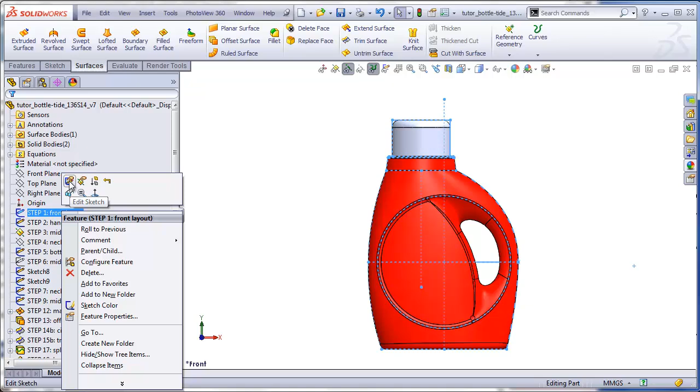First thing you want to do is always make sure that as much as possible your sketches are fully defined. So here is, for example, my layout sketch on the front plane, and we see that all my lines are black. I found it convenient to have the base of the bottle be centered right on the origin. And this vertical center line is the main center line for the bottle, which the circular label area is centered on. So this has a midpoint relation here for the base to my origin.

I also dimensioned this side of the bottle to my center line, and this side of the bottle to the center line also, but independently, so there is no midpoint relation here, which allows me to move this point left and right independently of this point. That way, if I'm having trouble getting the shape of the bottle to be just right in this area, I can tweak this point a little bit without messing up what's going on over here.

I have a secondary axis here, and that's what the cap and neck ring are centered on. You'll notice I'm hiding some of the dimensions off the screen here because, as I've mentioned before, my students have been asked to measure their own bottle and determine what the appropriate sizes are. It's not absolutely necessary that the bottle actually be centered right on the origin, but I find that the least confusing way to do it.

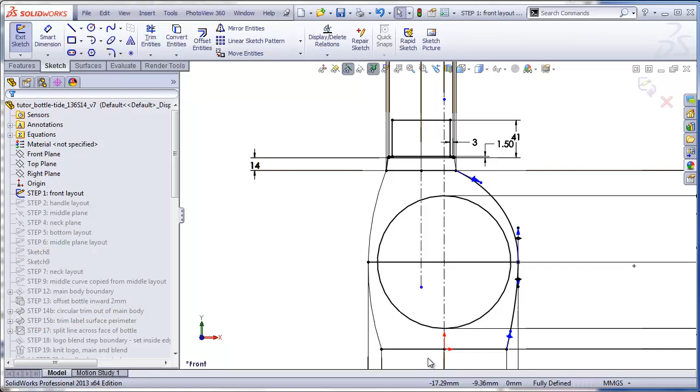Another sketch you should be careful about when you're drawing is your handle layout sketch. And again, you want to try to make all these dimensions fully defined if you can. Most importantly, all the pieces that represent this inner handle contour have to be tangent to each other and possibly, ideally, have equal curvature to each other.

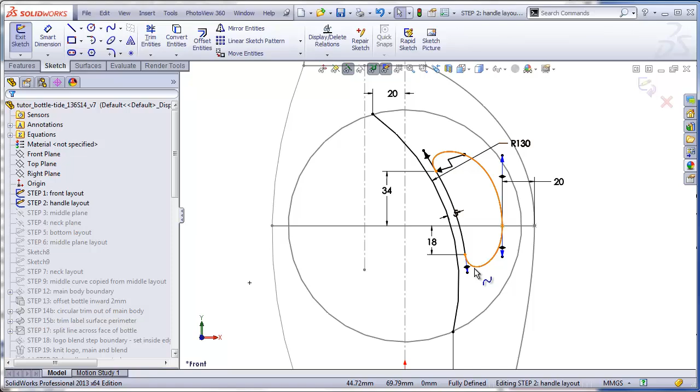I've seen some cases where some people have drawn these pieces and not have them perfectly tangent to each other where they met, and that caused great difficulty when they try to form the fill surface here and the fill surface here. It would actually fail. If Solidworks is refusing to make these fill surfaces, go back to this layout sketch and make sure that all these edges are tangent to each other.

The most difficult thing you will face, however, is drawing this layout on the middle plane. So let's edit that sketch.

And the thing that makes this hard is that we're trying to piece together 4 different splines, and we're controlling where the endpoints of some of those splines are with some construction lines that have coincident or pierce relations to the front layout.

Looking at this from the top view, it seemed to me that the easiest way to control such a complicated shape was to try to piece this all together and then have tangent or equal curvature relations between the joining pieces. But as you might have found out, that sometimes, especially if you have equal curvature between the pieces, these splines can start to freak out on you.

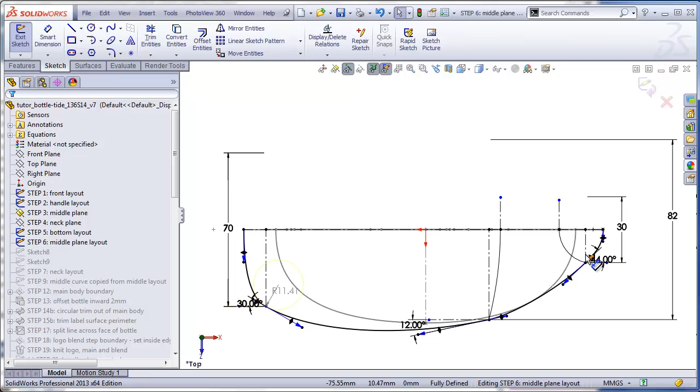So here's a few things that might help. First of all, our most important curve is going to be here and here, because a lot of this area and here are going to be cut out. So let me delete these right now.

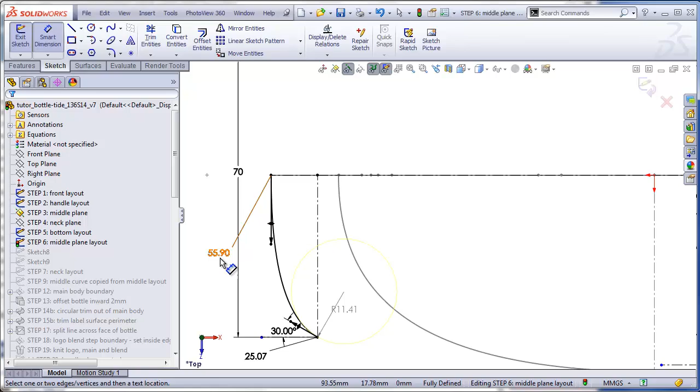And I think what you want to do is draw this first and draw this second, and ideally fully define these. I haven't done that, but what I'm going to do is add some dimensions to my handles. Nice thing about adding dimensions to your handles is that you can tweak things very easily by changing numbers by very small amounts. Sometimes that's hard to do when you're just pulling things by hand.

Now you see these are fully defined. The good thing about that is if I add any new splines and make equal curvature or tangent relations to them, it will force the new splines to adjust to these splines and not mess these splines up.

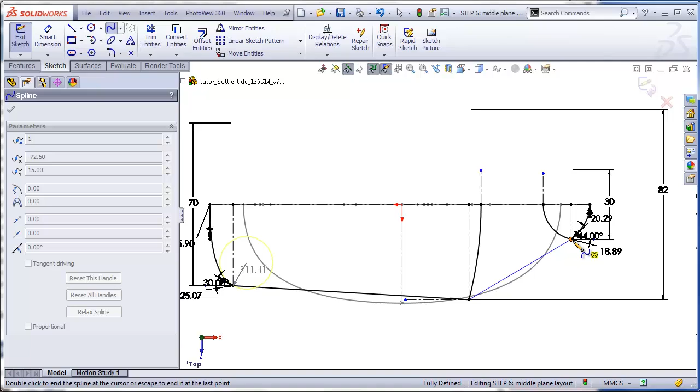So now I'll draw a new spline going from this point to this point, and one going from this point to this point. Here's a case where you might experiment with making this a single 3-point spline that goes from here to here to here, which might actually be easier than splitting this up into 2 separate splines.

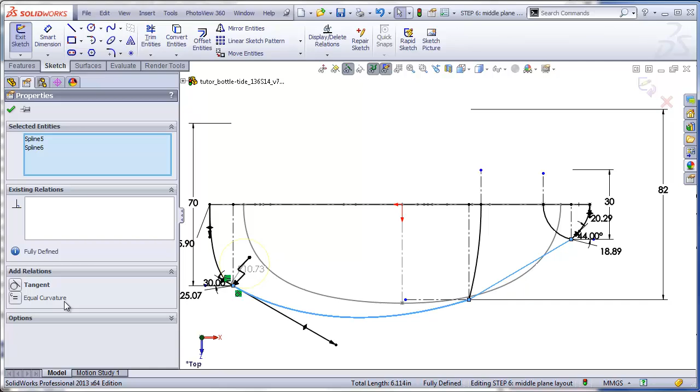Now I can make an equal curvature from here to here, from here to here, and finally from here to here. The good thing is, because I fully defined the 2 end splines, they aren't getting messed up by this equal curvature relation. Now I can start tweaking these handles.

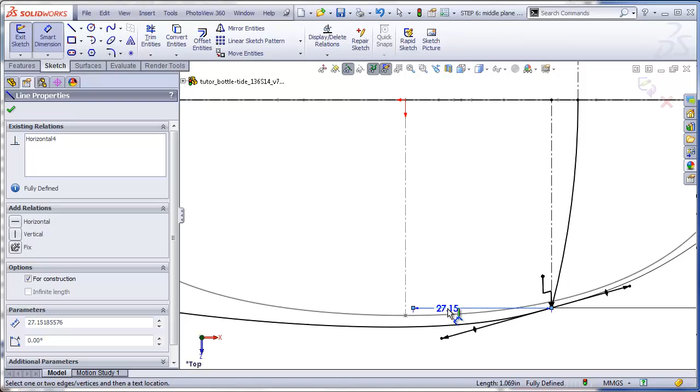Well, that caused a little error there, so I'll Control Z to undo that. If I want, I can also add an angle dimension between this line and my arrow here so that I can tweak this using dimensions rather than trying to do it manually by dragging the arrows. So I'll make that about 15 and hope that doesn't fail.

So you might find it easier using these as anchors and then making these splines conform. The important thing is to try to get as smooth a contour going through here as you possibly can.

Another thing that would be ideal is you want this contour to be completely outside of the contour of the base layout, which you see here in gray. It's okay if this area here goes slightly inside the base layout line, because this part's going to be cut out anyway for the handle. But if this goes too far in, you're going to have a bottle that sort of sucks in when it goes from the base up into the label area.

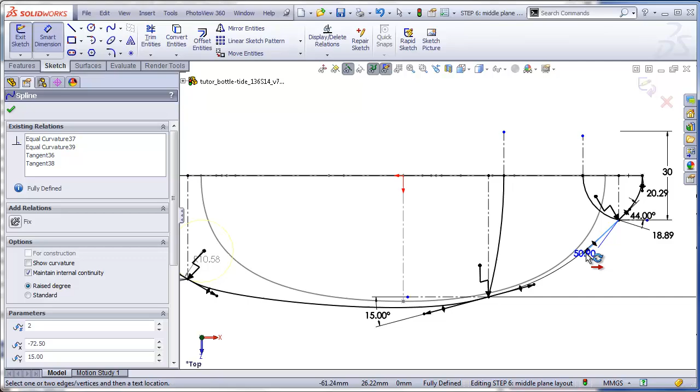Let's see if I can tweak this a little bit more. Well, I get an error there, but you get the idea.

Now, the other thing you can do is, if you cannot get equal curvature relations added without messing everything up, you can always just go with tangent relations instead.

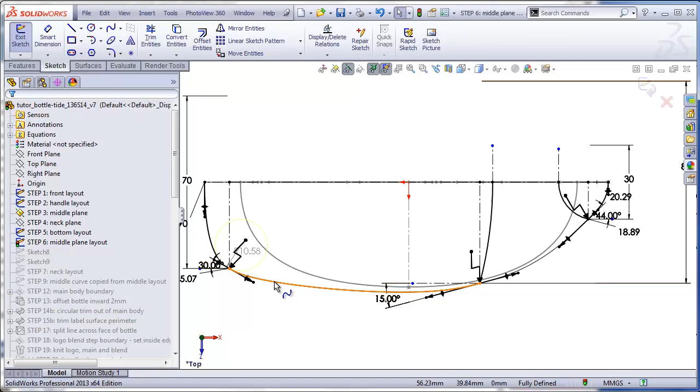Then when you're copying the appropriate elements for the actual boundary, use the fit spline to piece these all together into a single spline, and that will automatically give you equal curvature where these join together.

So let me finish this sketch, and what I'm going to do now is make the sketch that will actually be used within the boundary itself. I'll make a new sketch on my middle plane. What I want to do is copy all these pieces from my layout sketch using convert entities.

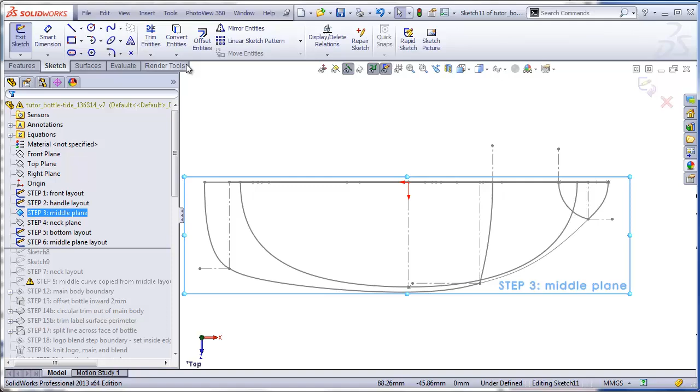And then what I want to do is grab all of these and go up to fit spline. I'm going to zoom in here and take a look at how well the fit spline is matching up with the original contours.

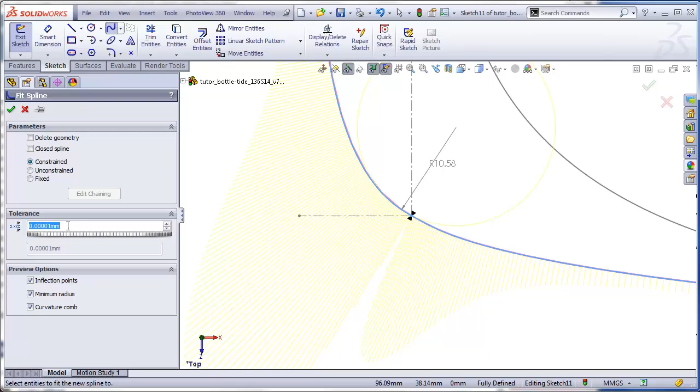And we can set this tolerance here. The tighter the tolerance, the better it matches the original contours. We don't have to go down to such a small tolerance, but we can probably go to about 0.1 millimeters, and that will give us a single spline created from the 4 original splines.

The nice thing about doing it this way is that the original sketch is still preserved in the layout, and then when we copy this into this sketch here and turn it into a fit spline, we still have the opportunity to go back to the layout sketch, make changes there, and this fit spline will be automatically updated.

Another nice thing about not using your original layout sketches for your boundary is that if you decide to make a radical change to your layout sketch, you can automatically update the boundary by just recopying the elements into the sketch that's actually used in the boundary, and usually the boundary will rebuild without any problems.

So if you've already made the boundary and maybe you weren't quite happy with the way it looked because this layout didn't come out quite right, don't feel like you have to delete the boundary and make it all over again.

Instead, modify your middle layout sketch, and then in the sketch that was actually used in the boundary, you can delete all the elements that were in it and recopy the elements from the layout sketch into it. You should get a seamless transfer of elements and have the boundary rebuilt.

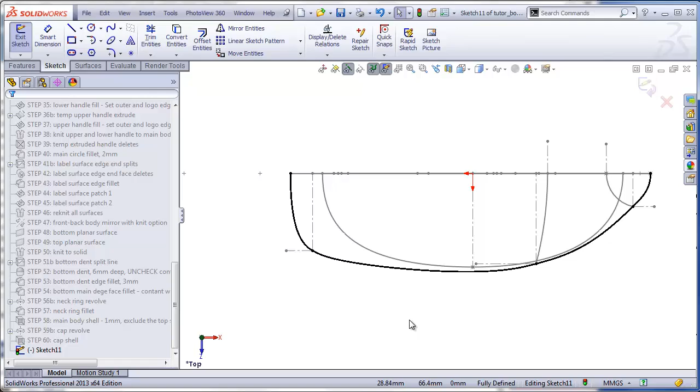Now, going back to the actual layout sketch one more time, there's one other thing you can do if you're just not happy with the shape of this layout. I've been shying away from this, but you've probably been wondering why we can't just make this a single 5-point spline. I'm deleting all the original spline elements, and I'm going to try to make a single spline that goes through all 5 of these points.

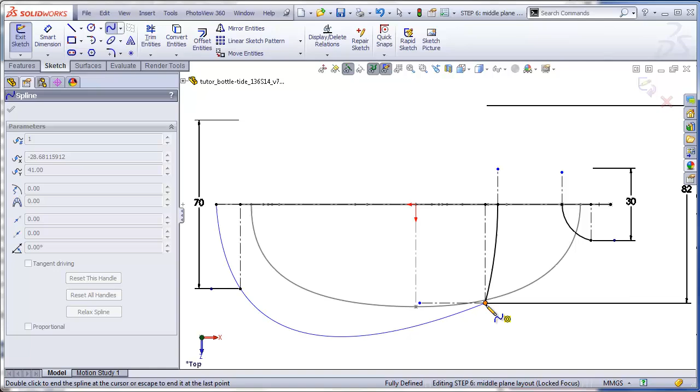It's a little scary because when you get that many points in a spline, you start tweaking on them. You've probably found on your own that the spline can freak out pretty rapidly. So I'm going to just try this: 1, 2, 3, 4, 5.

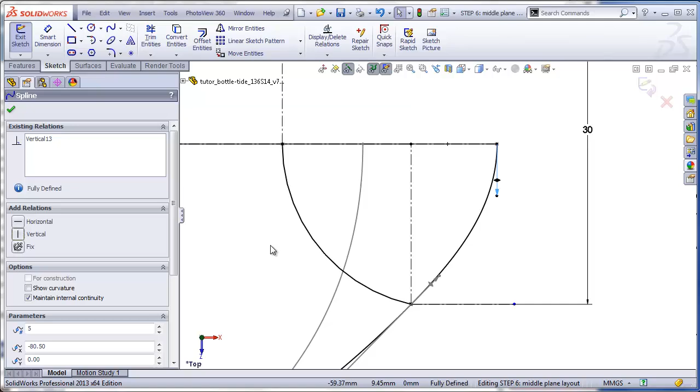Of course, there's no problem there if you're not going to mess with the handles, but we do need to mess around with the handles here. So I'll click on this here. I need to make this handle vertical, and I need to do the same with this one here. Now this is bulging out way too much, and this is too steep in this area.

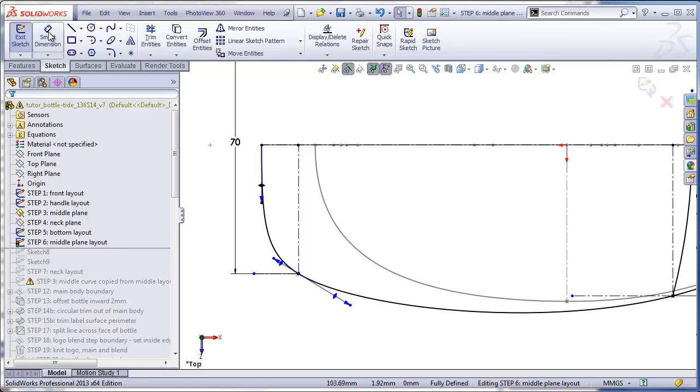So again, I'm going to very slowly tweak these handles, and this is the key here. You don't want to make any radical moves, or the spline might freak out or turn yellow or red. Probably the best thing to do is try to add a dimension to the angle of the control handle here. We'll make that about 60 to help stabilize this area a little bit.

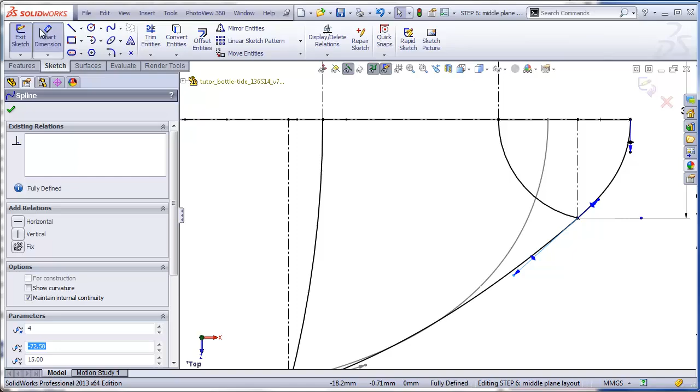And we'll come over here, and again play with the handles just a little bit. Drag this one down just a tiny bit. You see, very slow motions. And again, let's try adding a dimension here, and then go back again.

This is actually looking pretty good. We'll just try to tweak this handle here.

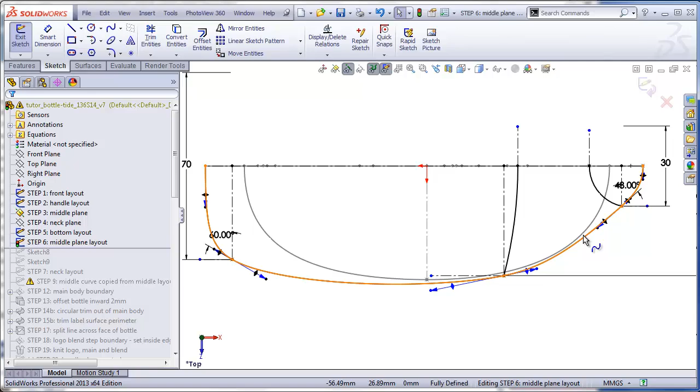And if you can manage to make this work, you'll get the smoothest result by making this a single spline. But I know it can be very frustrating.

One thing that can help is turning on your curvature combs. Right-click on the spline and go to Show Curvature Combs, which is just here at the bottom of the screen, and you might not be able to see it. Here we see the curvature where the spikes are the longest on the comb - that's the tightest radius. Where it's the shortest, that's the flattest radius. So here it's very flat, here it's very bendy.

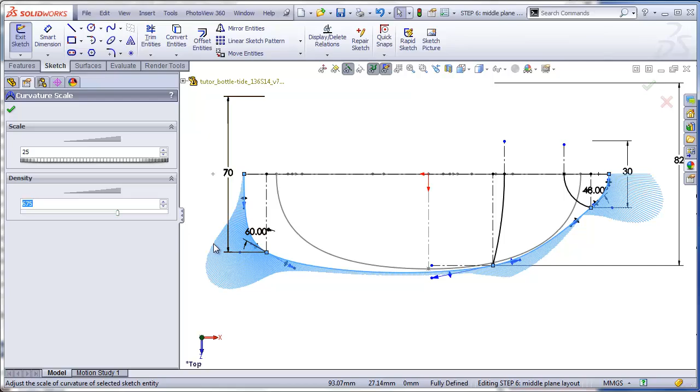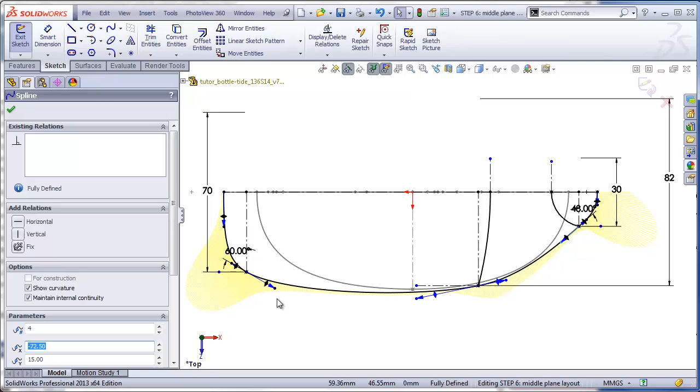You see we have a fairly graceful transition here, but it's a little bit abrupt here. We can play around with that a little bit and try to smooth out the transition of the combs in this area. We won't try to play with it too much or we'll probably mess it up. So if you can successfully get one continuous spline going here without it messing up on you, this might actually be your best option and give you the smoothest boundary as a result.

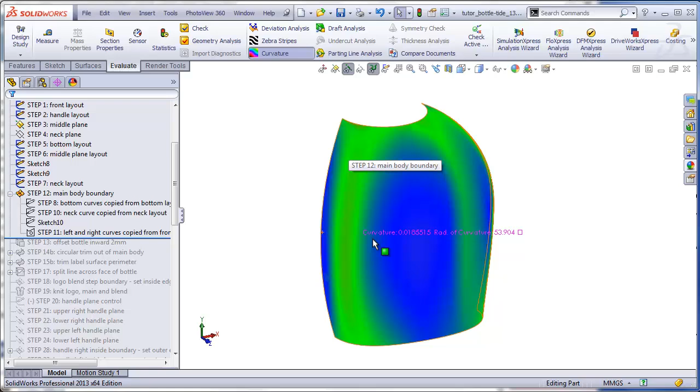Here's the result of my boundary using a single 5-point spline going around the middle here. We actually see this is probably a little bit better result than I had in the earlier videos. This is just blue, light green, slightly dark green, light green, and blue again. Whereas before I had some dark green stripes going through here that created a more abrupt change in curvature.

Another problem you might have encountered is when you first make your boundary, you'll find that the boundary surface has been split into 2 or more faces. If this happens, go back and look at all of your layout sketches, which would include the one at the neck, the one at the middle, and the one at the base. Make sure that all the pieces in the layout sketch are at least tangent to each other. If there are any lines that are non-tangent, it is likely that this sort of thing will happen.

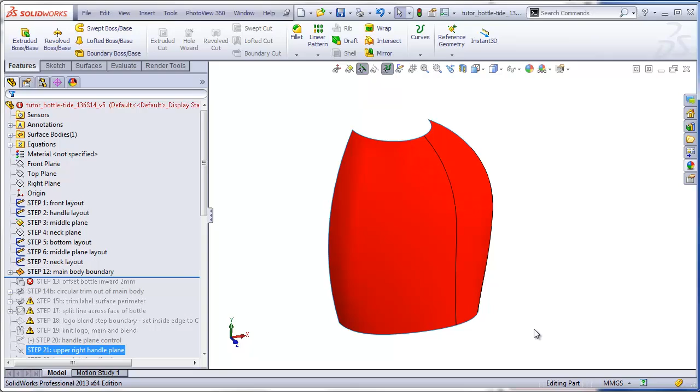If you've confirmed that everything is tangent, then your only other recourse is to use equal curvature to see if that helps the problem. And if you're having trouble using equal curvature, especially on this middle layout here, then leave it at tangent and use the trick I mentioned before, where you copy these into a new sketch and turn them into a fit spline. Hopefully that will take care of the problem.

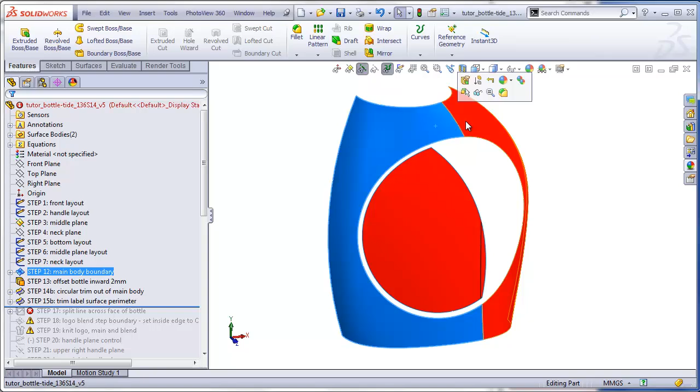Now let's say you had gotten a bad looking boundary to begin with, and it was split up into multiple faces because there was a non-tangency in a layout sketch. But you decided to soldier on and do all of your other steps, and you finally got a completed bottle. Now you've decided to go back and fix these problems.

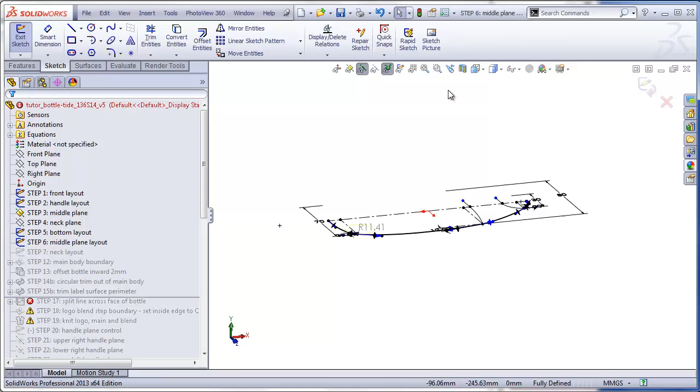So if we go back to our layout sketch here on the middle plane, which I happen to know has a non-tangency in it, because I purposely put it in right here, I'll make these lines tangent again. And that will update the sketch that was copied into the actual boundary.

We see here that the boundary looks nice again, it's all smooth, but some things are broken in the model. So you don't have to feel like you have to rebuild all these and then rebuild the whole feature tree. You can probably repair these one at a time.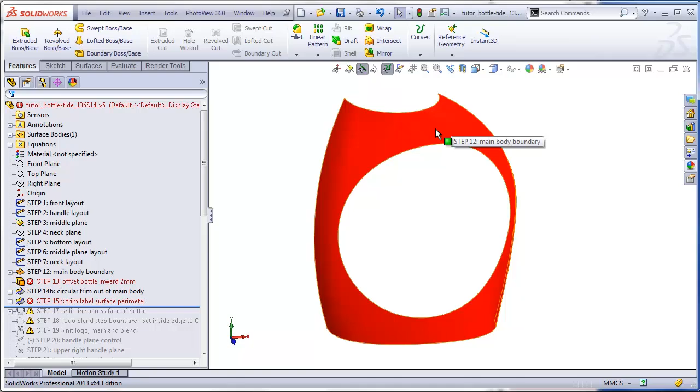So we see the 2mm offset for forming the label surface here has failed. That's because we've gone from a two-face surface body to a single face, and that has confused things. So I'll just right-click on this, edit this feature. It's lost the two faces, and I'll just reselect the entire face of the boundary and check on that.

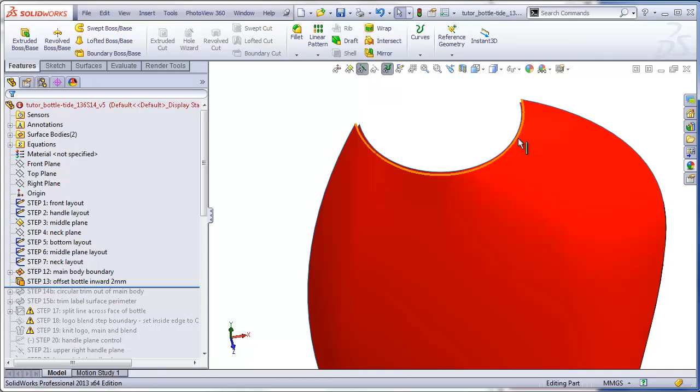Answer yes, and I'll roll back here just so you can see what has happened. It is now correctly re-offset that surface inward by 2mm. And now the other commands that follow that have automatically corrected themselves.

So I've got a circular trim out of the boundary there, and I've gotten a trim out of the label area, which was an offset of this boundary.

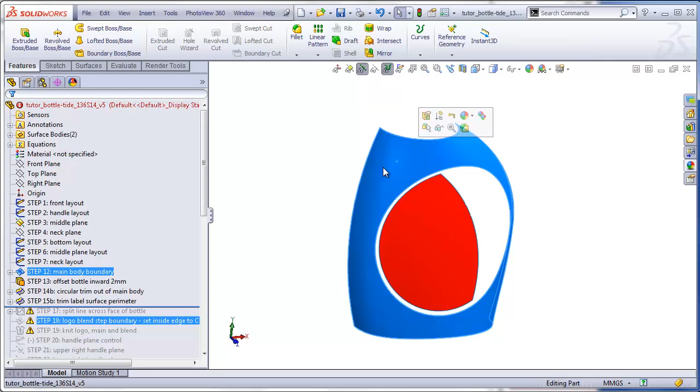Sometimes another thing that can happen is a trim will fail when you repair a surface, because it doesn't know how to trim the new surface anymore. And again, if you can, you want to avoid deleting a feature from the feature tree, and instead you should try repairing it. If a trim suddenly has an error after you've repaired one of the boundary surfaces, what you have to do is retell it which surface is going to be trimmed out.

So I'll just edit this, pretending that there was an error here in the first place. What you have to do is delete the sketch from the trim toolbox, and just simply reselect the sketch and re-mouse over the area that you want to delete or keep. And that will cause it to reset itself again.

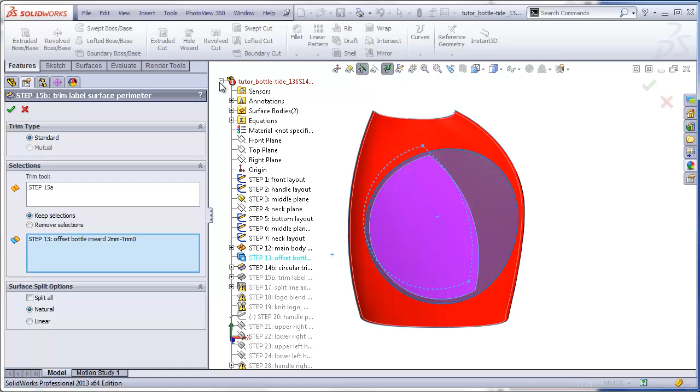The trouble is, when you reselect the trim tool, in this case our sketch here, you can't reselect it from the feature tree. What you have to do is make sure that that sketch is visible first, and have your sketches turned on, preferably just the one that you are concerning yourself with.

And then if you have to reselect that sketch, you would first delete it here in the trim tool if this was failing, and then you have to reselect it from the graphic area in order for it to recalculate how the surfaces are supposed to be trimmed.

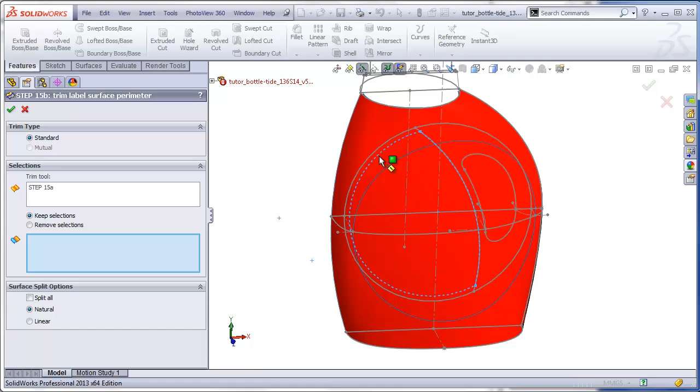So make sure that's turned on, and then you can mouse over the area that you want to keep, which is right here. It's much better to repair a trim than to delete the trim and do it all over again, because if you have to delete the trim and do it all over again, there's a good chance that a lot of other features further down in the feature tree will break.

Well, those are all the tips that I have for this bottle, and I'm hoping that you didn't have to use any of them, and that you successfully made the bottle in the first 4 parts. But if not, I hope this has helped out. This concludes all of the videos for the Tide Bottle project series.